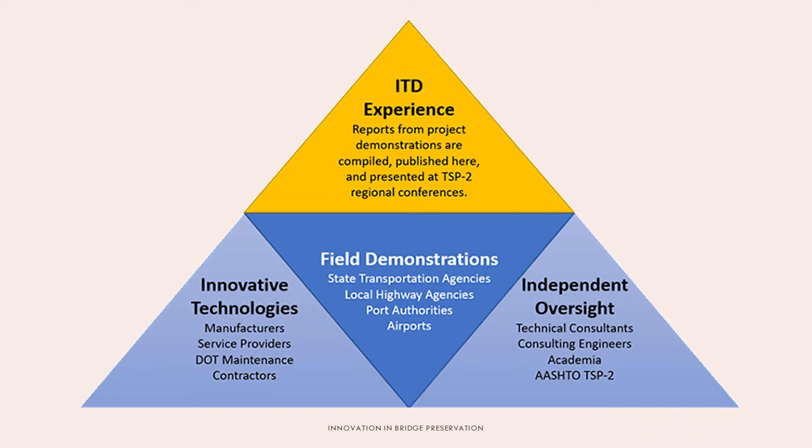So first of all, the ITD, the Innovative Technology Demonstration, we have about 20 members, and we have about 7 innovative programs underway. So there are 6 different partners, one of them being the manufacturers, so the industry, the manufacturers of the innovative products that at some point we want to bring to the market.

We also have the consultants, and the consultants play a very important role here because mainly they are a third-party consultant, and they are the ones writing the reports. And the reason why this is important is because if the reports are written by the manufacturers, we're going to cherry-pick the best projects, and we're only going to talk about the good stuff. So having a third-party consultant is important exactly to give the credibility that's so important to this program.

We also have the DOTs, so the owners. So for every single structure, the way it works is that the DOT buys the material, they do the lane closure, they supply us with the manpower to do the installation or application of the products, and also they are available to do the tests, which depending on the program is every year or 3 years or 5 years, but that's their role.

We also have the TSP2, and the TSP2 is important. Our program is under the TSP2. And we also have the academia. That's important because we might have a consultant that's part of that. And also if there are some suggestions to our program, that's exactly where they fit. I'm going to have Kyle talk about a few of the technologies that are present on the ITD.

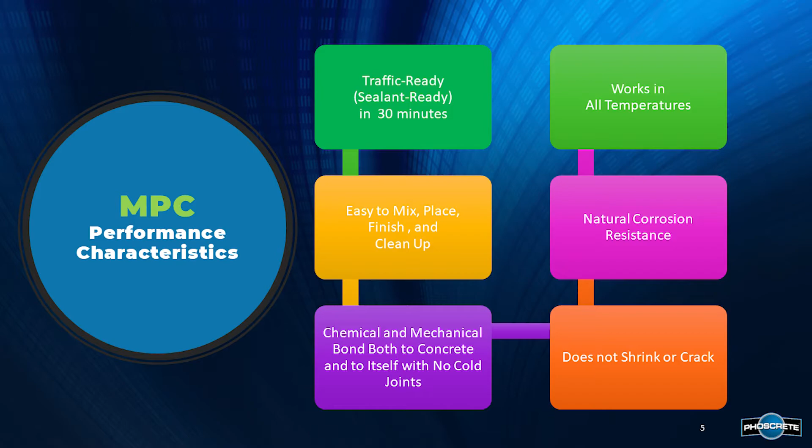High early bond strengths, tensile strength, and natural corrosion resistance make it an excellent choice for concrete repairs. And this is the overview of how quick it gets ready, how easy it is to mix and place, and then the mechanical bond to both concrete and itself as well as steel.

The ITD started back in 2014. Phoscrete was actually the pilot program. The technology we used back then was MALP, which is magnesium aluminum liquid phosphate. What was unique to this is that the material has a liquid activator with a negative 20-degree freezing point. So again, this was done back in December of 2014. We had some re-inspections about 3.5 years later in 2018, and we continue to monitor this.

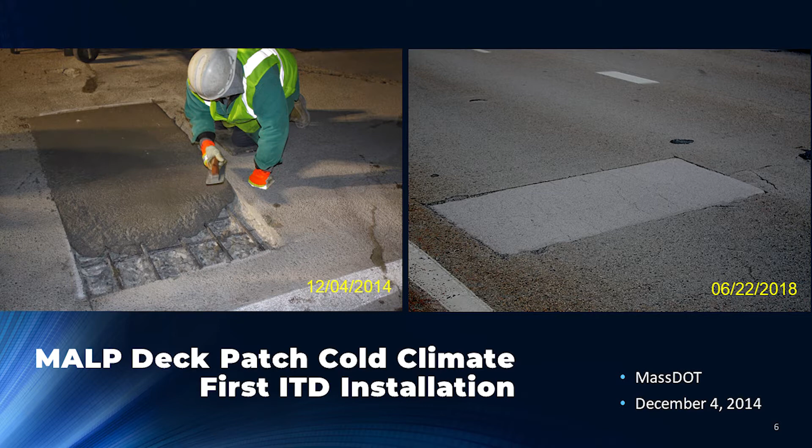And again, this repair was performed in 30-degree temperatures using fast set admix, so still traffic ready in an hour or less. This is another application that we did. This is on the Packsaddle Bridge in Oklahoma.

We used 47 pails of our Phoscrete VO, which was installed with no sandblasting. The unique aspect here is that typically you do have to sandblast the rebar and treat it. Here, there's no sandblasting. It was installed by the Oklahoma DOT Bridge Maintenance Crew, and we continue to monitor it to this day. This was performed in 2017 in March, and they had a reinspection about 2.5 years later in

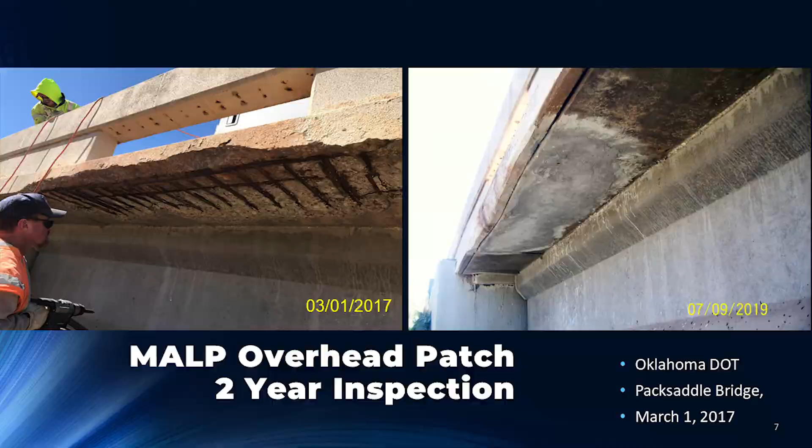One of the cool things that came out of the ITD program, especially with Phoscrete, is the sharing of knowledge. So when PoreShield presented its durability capability using the soy methyl ester, or SME-PS, Phoscrete was searching for ways to better protect our installations from aggressive salts and the freeze thaw.

We tested PoreShield as an admixture to Phoscrete, and we were surprised to learn that adding the soybean oil component did not impact any bond or compressive strength. It didn't mess up any of our ASTM tests, but it significantly helped our freeze thaw and salt scaling durability, and it reduced our already low dry shrinkage.

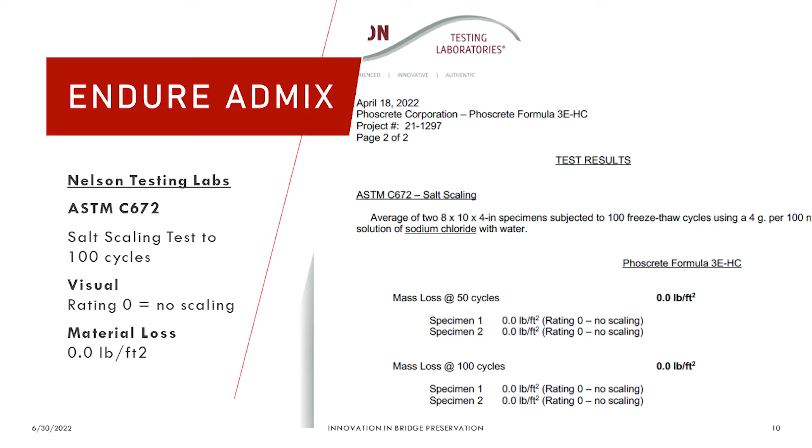Here are the results. You probably can't see it, but the main thing that we want to get from it is that we got 0 material loss at 50 cycles and a visual rating of 0 for no scaling. We asked the lab to run 100 cycles, and we got the same perfect scores.

We signed a licensing agreement with the Indiana Soybean Alliance to market PoreShield under the brand name Phoscrete Endure. As an admixture, not only does it provide these long-term benefits, but we also found that it makes mixing and placing the material that much easier as well.

Brings me to the SME-PS. This is a product that we got on the ITD program about 2 years ago. It's a soy methyl ester polystyrene, soybean oil-based treatment that fills the concrete pore structure and protects at least 10 years. This product can be used as an admixture with Phoscrete or as a standalone product that can be spray applied or painted on.

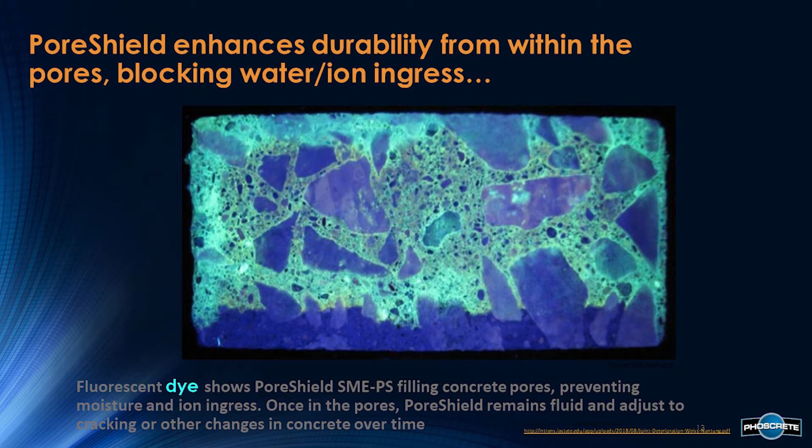This particular bridge shows 23,000 square feet, and it was treated in 50 minutes. As you can mostly see here, the fluorescent dye shows the penetration of PoreShield and how it fills the pore network to prevent future fluid ion absorption. So all that fluorescent light is the PoreShield getting absorbed in the pores of the concrete, making them hydrophobic.

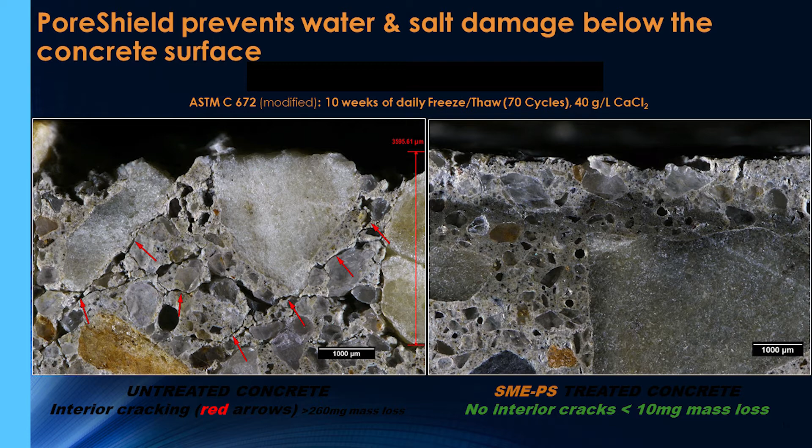These are high resolution photos that show the damage of 70 cycles of freeze thaw combined with a high concentration of calcium chloride. The samples on the right were first treated with PoreShield and show no damage below the surface.

And it's a super easy method to apply it. You just go about 6 inches on either side of it with a spray-applied roller, and you just go across. And again, the studies show that protecting the joints is a cost-effective way to protect the entire pavement.

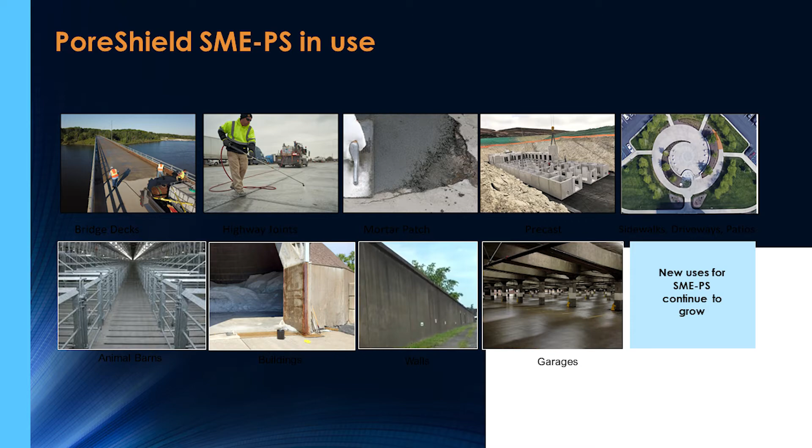Beyond pavement joints and bridge decks, salt storage buildings have been identified as an aggressive environment for concrete, where PoreShield offers significant extension of service life for minimal cost. For a gallon of PoreShield, you get about 200 square feet of coverage, and it's a pretty low-cost, easy way to add life to your pavements.

Again, some more applications: sidewalks, control joints, industrial floors.

And then now we have Jet Filter. Jet Filter does have a booth here, so again, if you want to learn more about it, feel free to stop by their booth. The Jet Filter system has an innovative solution to keep weep holes from clogging. Please feel free to visit their booth and ask some more technical questions, and they have some samples here that you can touch and play with.

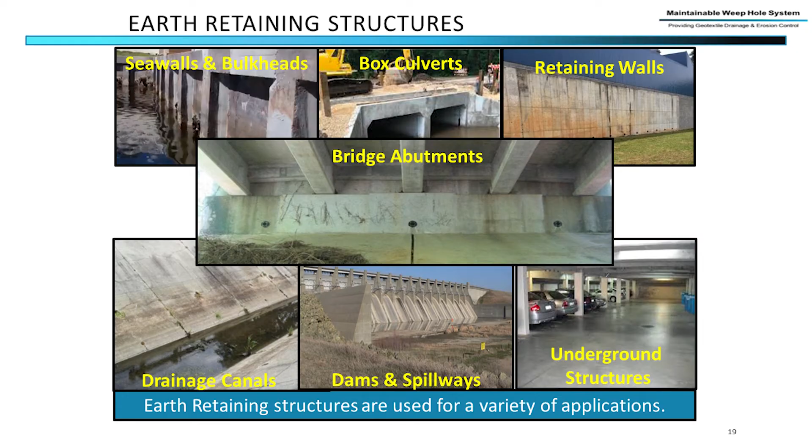Traditional behind-the-wall drainage systems fail over time due to geotextile clogging, which increases hydrostatic pressure, or tearing that allows backfill soil leaching. Drainage failure results in deterioration of earth-retaining structures and repair costs that can be prohibitive.

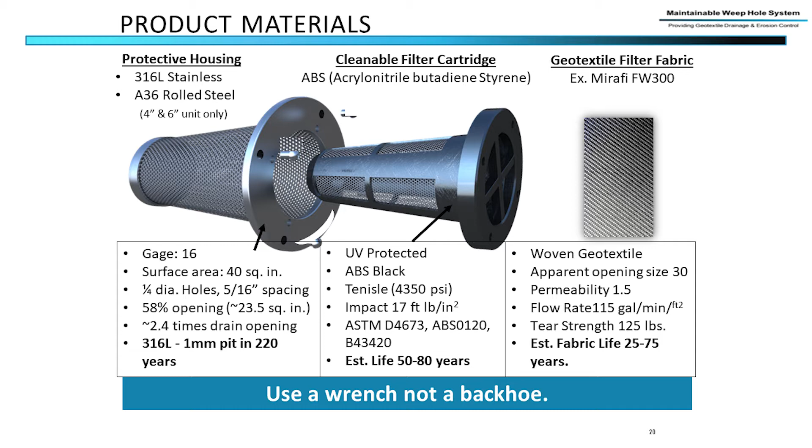This is a picture of the design of it. It's innovative, it's simple to install, and it's cost-effective to maintain. Transportation applications include retaining walls, bridge abutments, wing walls, box culverts, and MSE walls.

It has a conical protective housing to hold a removable, cleanable filter cartridge to allow quick drainage while controlling soil loss. There's 230,000 units installed around the world and in 48 states.

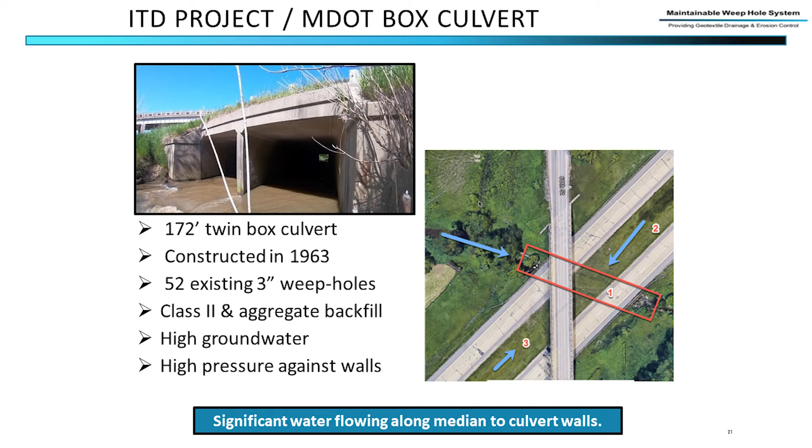For their ITD project, Jet Filter System partnered with Michigan DOT as an owner and LS Engineering as the independent consultant, monitoring and data logging for a final one-year report. This is the location of it. This is pretty cool here.

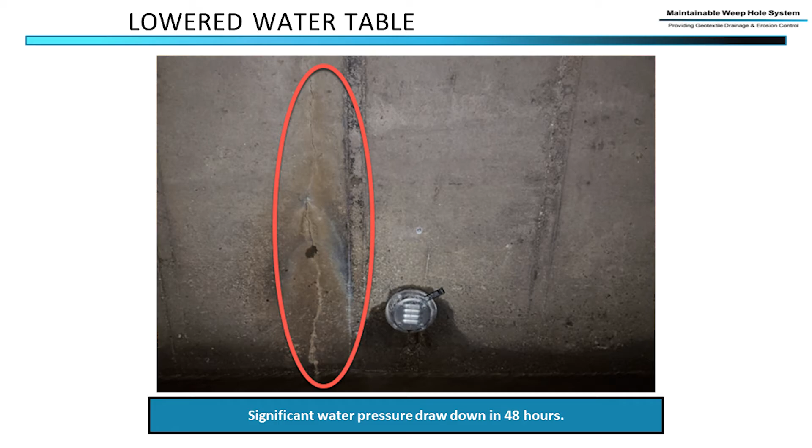In this next slide, after the installation, the water table in the backfill is lowered to the level of the installed Jet Filter. This reduced leaching and resulted in drying of the walls and the ceiling. So again, all the water was forced to the bottom, and everything above that installed filter is dry.

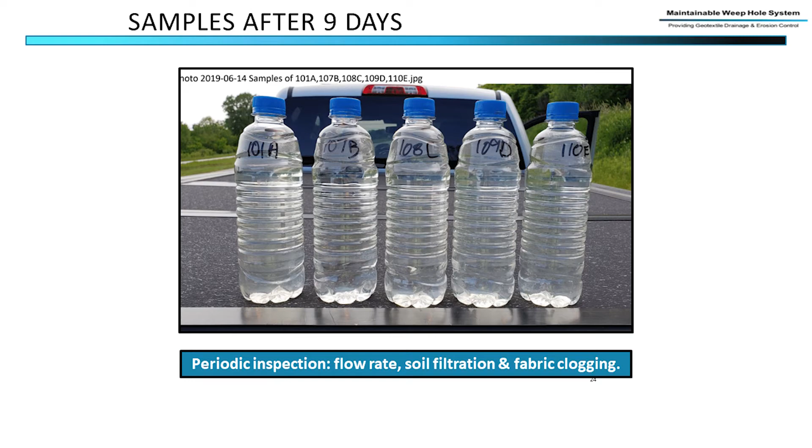The last one I'll be talking about is a pure zinc primer innovation by Galvatech 2000. This is for active cathodic protection, to repair either hot-dip galvanized, or it can even be used instead of it. It's a one-component application that provides active cathodic protection to steel structures with its extra fine, pure atomized zinc.

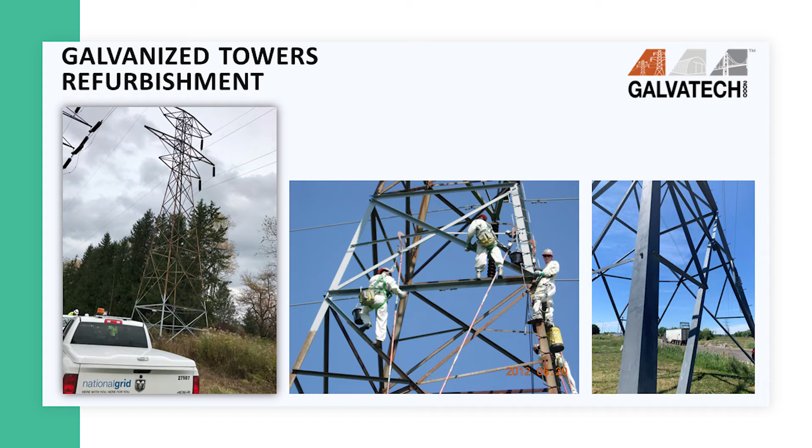There's more than 5,000 towers protected in North America since 2011. It's perfectly adapted to transmission and telecommunication towers, with more than 200 transmission towers each year with the National Grid in New York, extending the lifetime of maintenance programs.

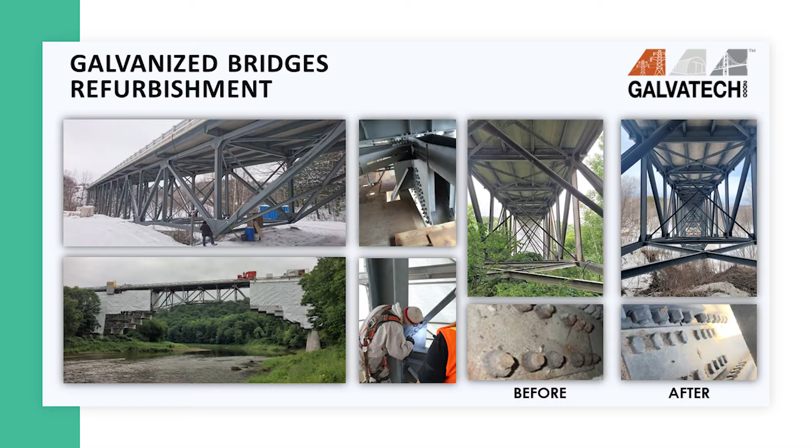You can paint over the old zinc layers to recharge the cathodic protection and galvanize steel in one coat. Many galvanized bridges and related infrastructure require recoating after a couple of years, so this is a great solution to prolong the life of that.

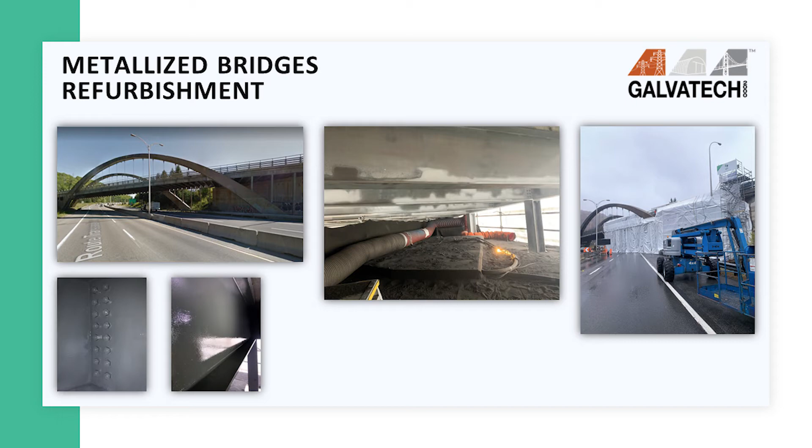It merges with old zinc layers to recharge the cathodic protection of the galvanized steel all in one coat. It's perfectly adapted for maintenance projects. Here it is, used as a sealer and top coat on metallized steels. It also penetrates the surface irregularities without leaving air voids, merging with the metallized layer to increase the mass of zinc and prolong its service life.

TrueTech Bridge has an innovative product, a ClearCast form for concrete placement. Different from traditional systems, with this system you're able to see underneath, which brings more safety for the contractors installing it. It's easier for the maintenance team to verify the condition of the deck, and it's faster to use as well.

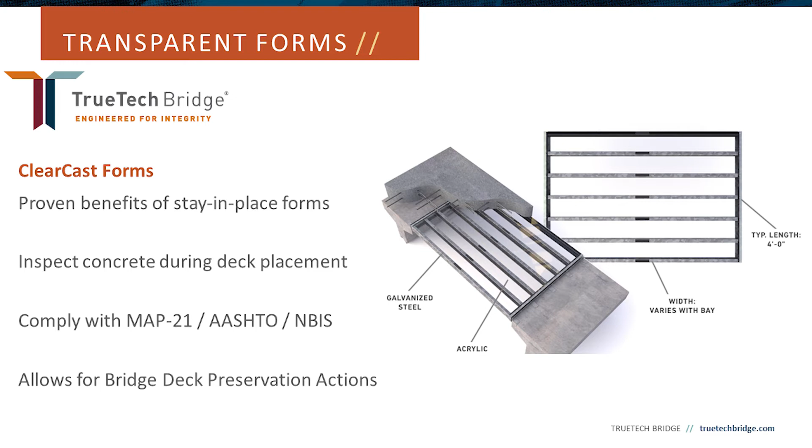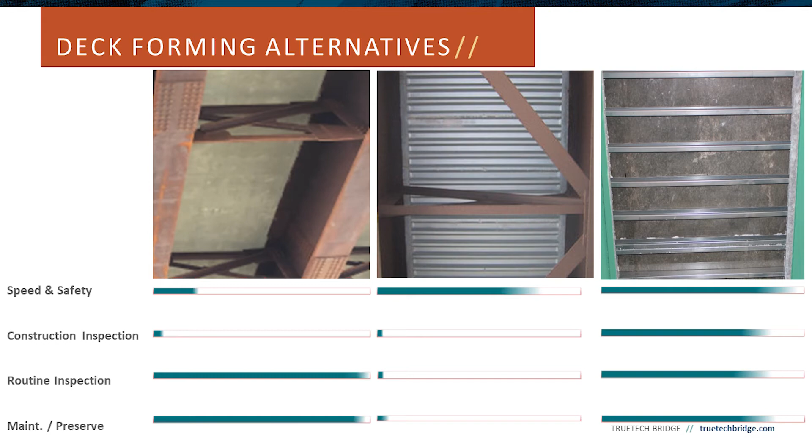It's a very innovative technology. Here we can see the traditional ways of doing forms, and the last picture is the TrueTech Bridge system, so it's a very interesting solution. And now they are also testing vertical applications in some roads, so they're testing new ways of using their technology.

We also have here the Salen epoxy coating. They're also here on the show, so if you guys want to go there and learn a little bit more about them. They have this technology that's very interesting.

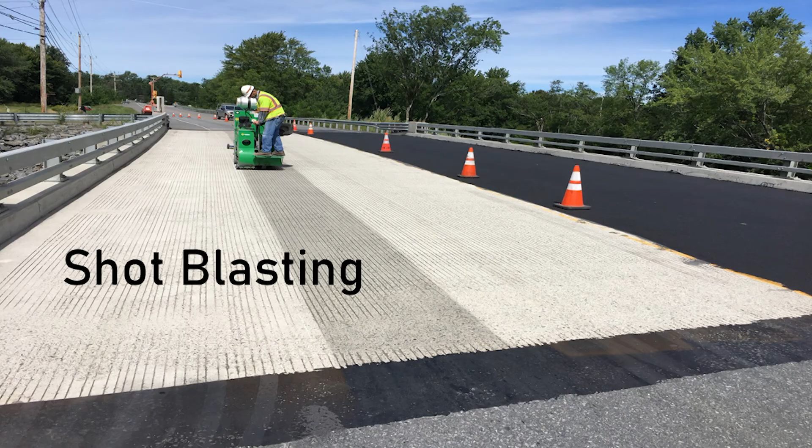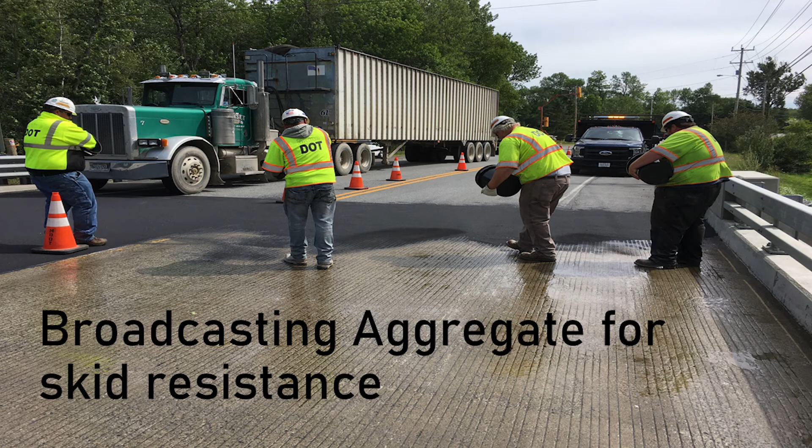The first step is the shot blasting of the area. Then after that, they spray the Salen on the structure, on the concrete. The following step is the application of the epoxy healer sealer to fill all the existing cracks in the concrete. After that's done, they broadcast the aggregate for the skid resistance, and the project is done. So this is a different way of doing that, and it brings a lot of value and durability to the concrete structure.

And we have the Integrated Gel Waterproofing System from Alchemco. This is a long-lasting waterproofing product with a few unique abilities. One of them is the reapplication period of 25 years.

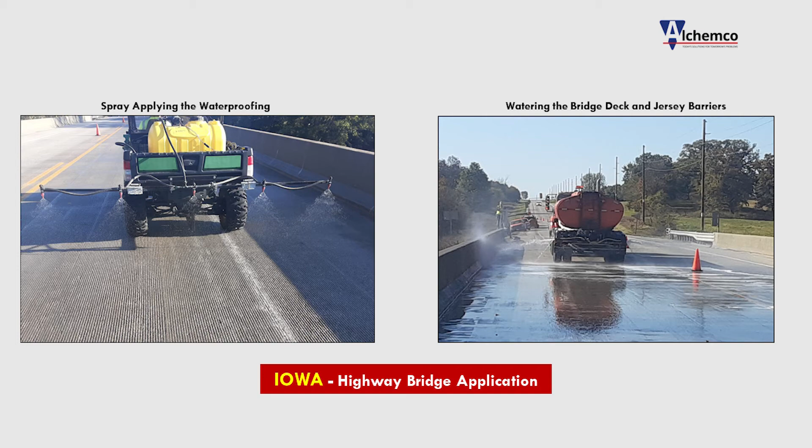So often when we talk with DOTs, they are concerned about lane closure. It's a very fast product to apply. You can close a lane for just a few hours, do the application, and you don't have to go back to this bridge for over 20 or 25 years. So it's a very simple and easy application.

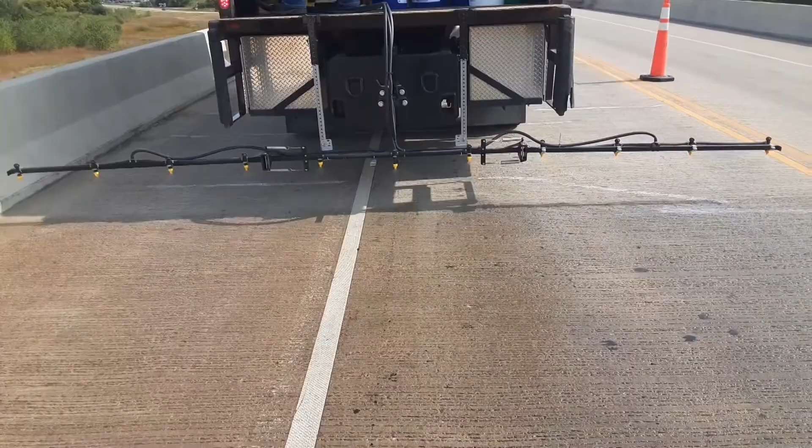This is a video of the Soft Seal application, where they are using a spray bar, and the application can be up to 40,000 square feet per hour. What's unique about this product is that it creates a flexible gel inside the structure, and this gel is capable of sealing cracks up to 2 millimeters. So basically, if you have a crack in the concrete that you can put your car key inside, this material would be able to waterproof that crack, and water would no longer penetrate.

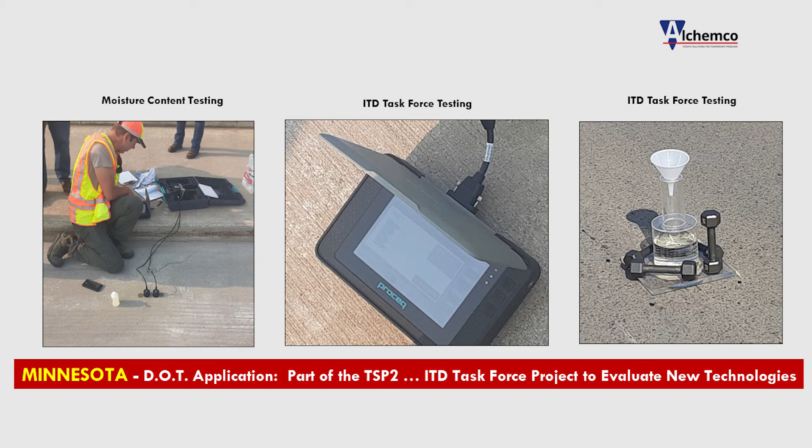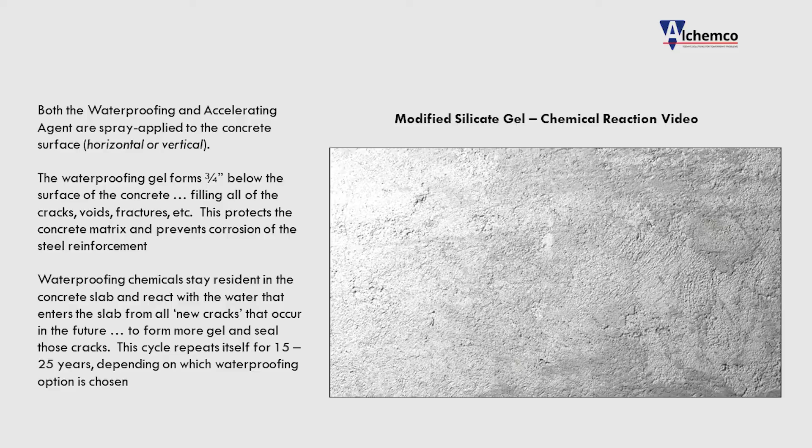So this is a picture from the Minnesota DOT when they were doing the ITD program. And here you have the chemical reaction of what happens inside the concrete when this product is applied. It's a quick 30-second video showing the reaction. After this product penetrates the concrete, it goes about 3/4 of an inch, and it's a clear liquid.

This product is going to form a white gel. You're going to see that immediately when one product is in contact with the other, it forms this white gel. This white gel is exactly what's going to be waterproofing and protecting the structure from water, corrosion, freeze-thaw, and a lot of different situations.